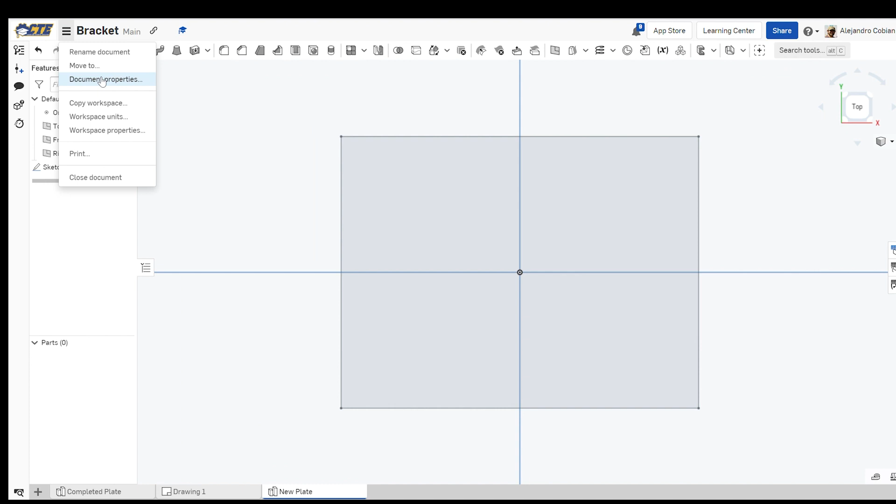Alright, so let's go to our top view. Let's create a sketch on our top plane. Let's go ahead and create a center point rectangle. This is centered right at the origin. Let's go out like this, and we accept. Keep in mind I am in inches, so make sure you use inches.

As I said earlier, right now we do not care about dimensions. Let's just go ahead and draw out whatever is going to be on our top plate. So we have a circle here, and another circle here. This circle is not centered at this horizontal line. I'm going to add an ellipse that is vertical to the 2 circles. We'll just place it here, and we'll make it like that.

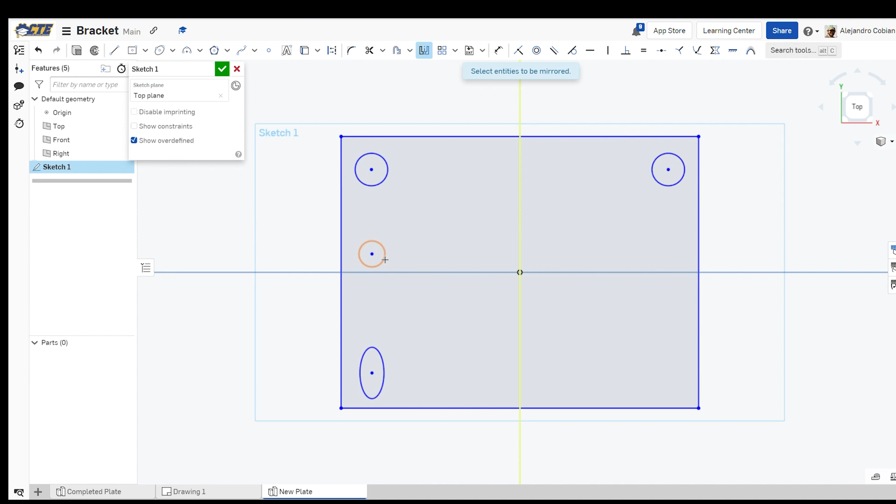So now we're going to use a mirror tool. Let's mirror our 2 circles and our ellipse about this vertical line. Let's accept that. Let's make sure that these 2 are equal to each other, making these equal as well. And now we accept, so now we're going to zoom out.

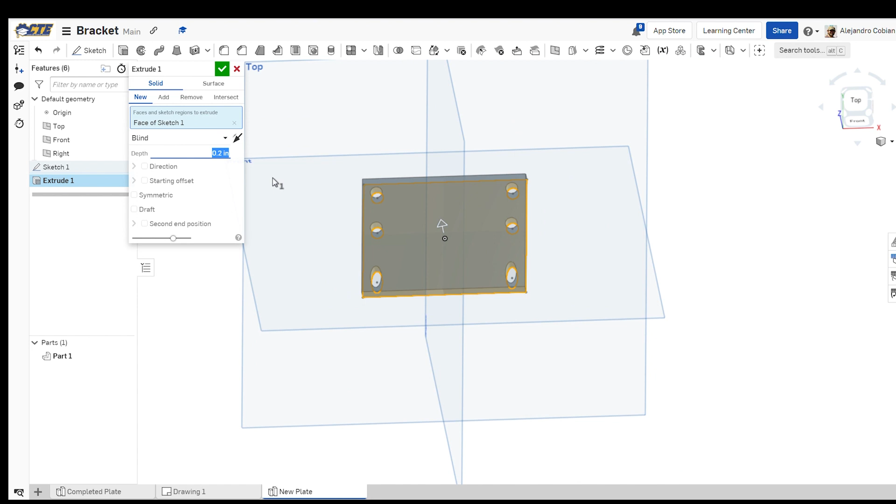And what we're going to do now is do our first extrusion. So we're selecting this plate, and let's just make this at 0.2 inches. And accept. Now I'm going to create another sketch on top of this plane right here.

This will help us to create this vertical piece. So once again, I'm on sketch 2 and I'm on this plate right here, on the face of extrude 1. Let's go ahead and use corner rectangle. Let's view our top view.

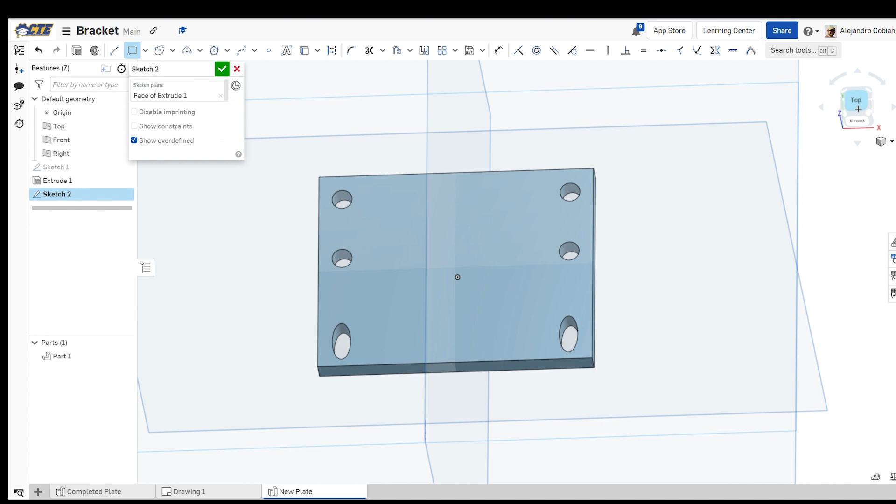Select this point and select this. Alright, and we accept. Now we're going to extrude again, extruding this rectangle that we just created. As far as the dimensions go, 1 inch is fine. Go ahead and accept this.

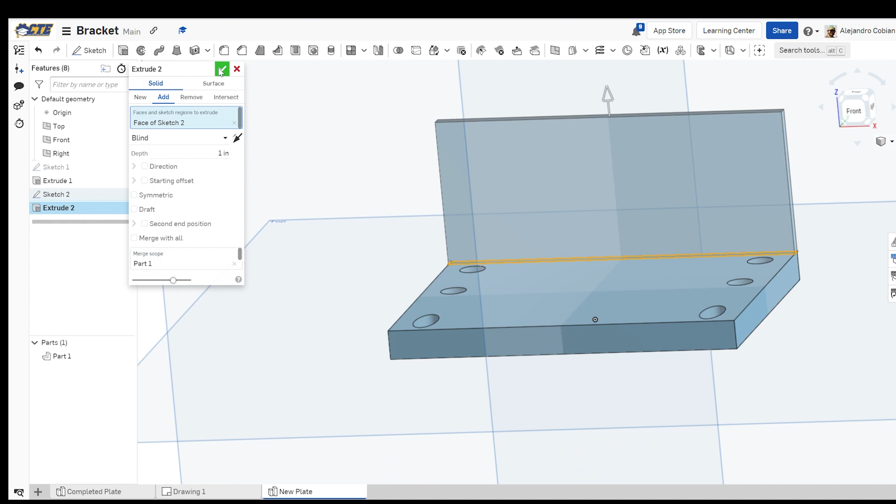So now we're going to go ahead and create these 3 circles that we see here. Let's go ahead and view our front view. Let's create another sketch right on this face here.

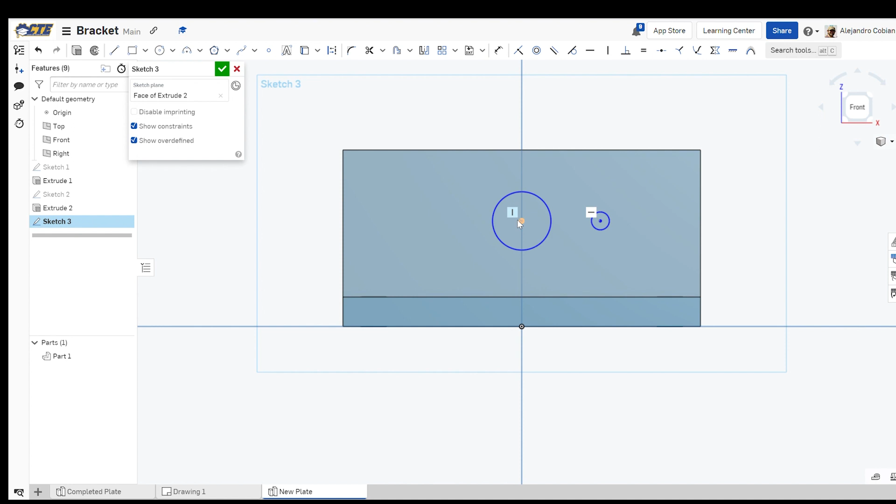Let's select center point circle. Let's place it right here, vertical to the origin. And then we have 2 other circles that are smaller, which are horizontal to this point here. Notice this point is horizontal to this center. And now I'm placing another circle, which is horizontal to our larger circle. Then these 2 are equal to each other, and they're also symmetric. Notice they're symmetrical about this vertical line.

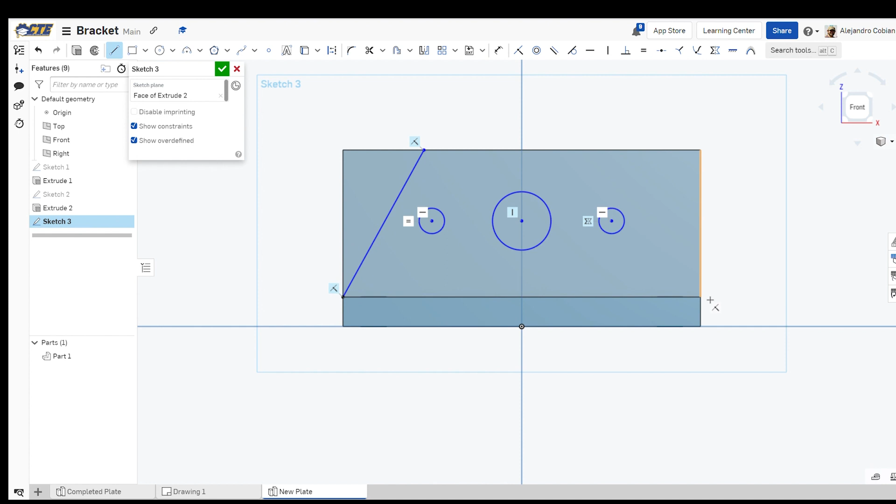Alright, and lastly, let's go ahead and select our line tool. Let's place a line from this corner up here, and we can adjust these later. And then another one here. These 2 lines will be symmetric as well, so go ahead and select them, click the symmetric tool, and select this vertical line. And go ahead and accept.

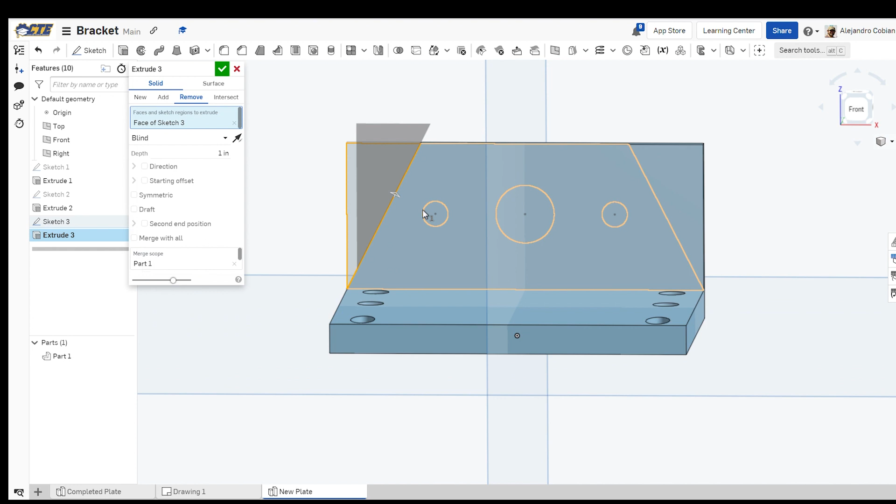Now we're going to perform another extrusion. So go ahead and select extrude, remove, and we're selecting this face, circle, this, and this. Notice we're going through all. So once again, select blind, click through all, and accept.

So at this point, we've created the bracket, but the dimensions are completely off. So now we're going to clean this up slightly just by adding a few fillets, using a fillet tool.

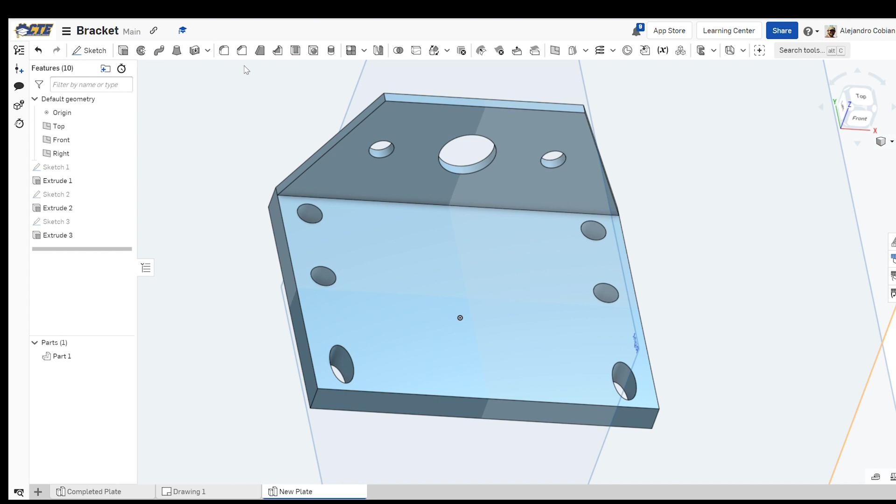So let's go ahead and select this edge, this other edge here, and then these circles here. And that pretty much sums up our drawing. Oh, let's also select this area here and then this one here. And we're pretty much good to go. So go ahead and accept this.

In this section, we're going to take some time and actually add the dimensions that we see listed on our top view, our right side view, and our front view. Let's start by creating the square for our bottom plate. So let's go to sketch 1, reorient for the top view, and zoom in.

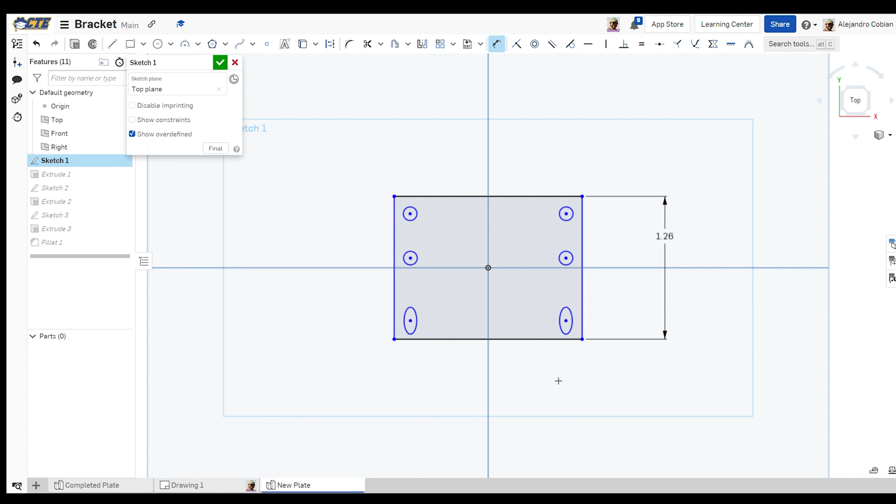The max width will be 1.26. Then the max length down here will have a value of 1.415. Let's zoom in. Recall that if these are in blue, we can just manually move them around. So I'm moving these. Before we continue, let's add a vertical constraint from this center point to this center point. If I move this, everything moves now. Let's zoom in this view.

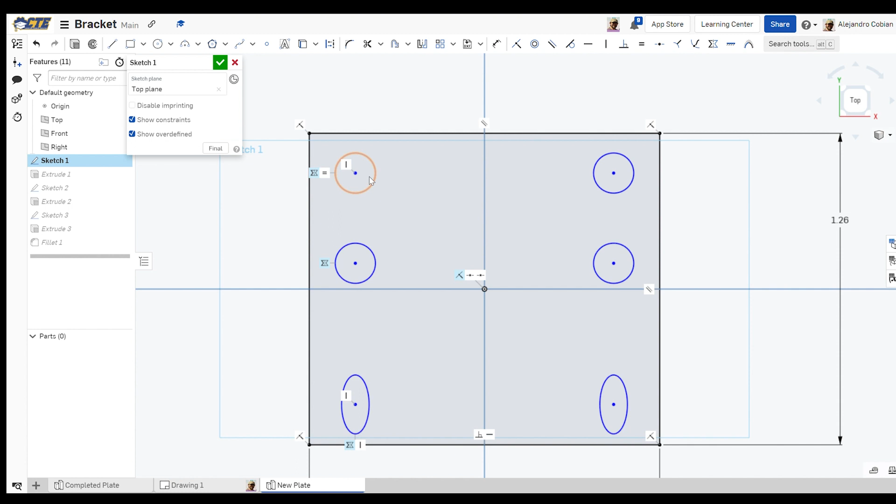I'm going to add a dimension for the diameter of the circle. One circle will have a value of 0.12. The width of this ellipse will have a value of 0.12 as well, and the height of the ellipse will be 0.36. I'm going to move it up a little bit so it doesn't look too awkward.

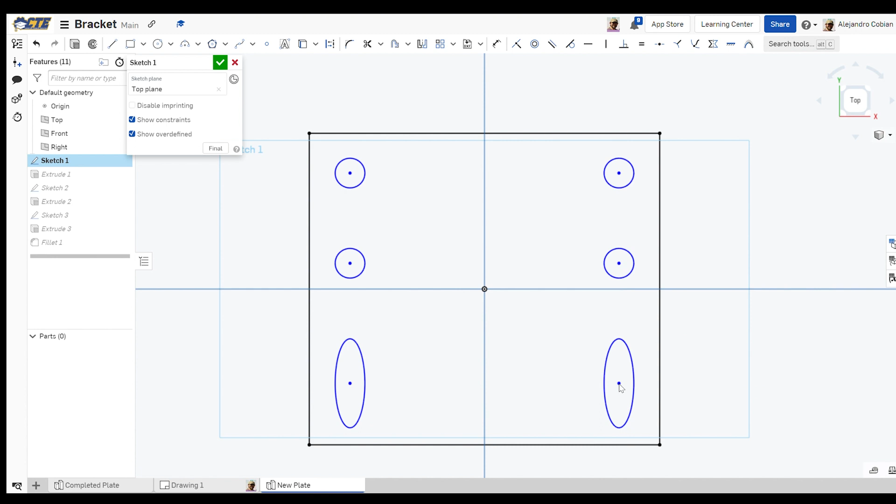Let's select the center of the circle, the edge of this wall. We're going to add a value of 0.135, and notice everything moves accordingly. The distance from the center of the ellipse to our bottom wall will be 0.194.

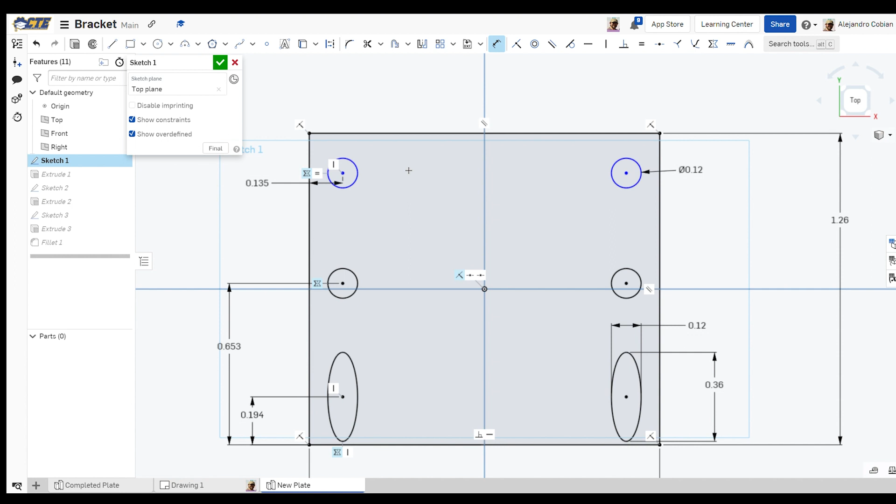0.194. Then the distance from this circle right here to the bottom will be a value of 0.653. And then the distance from the center of this circle to the bottom face will be 1.021. Notice everything is blacked out. We are good to go.

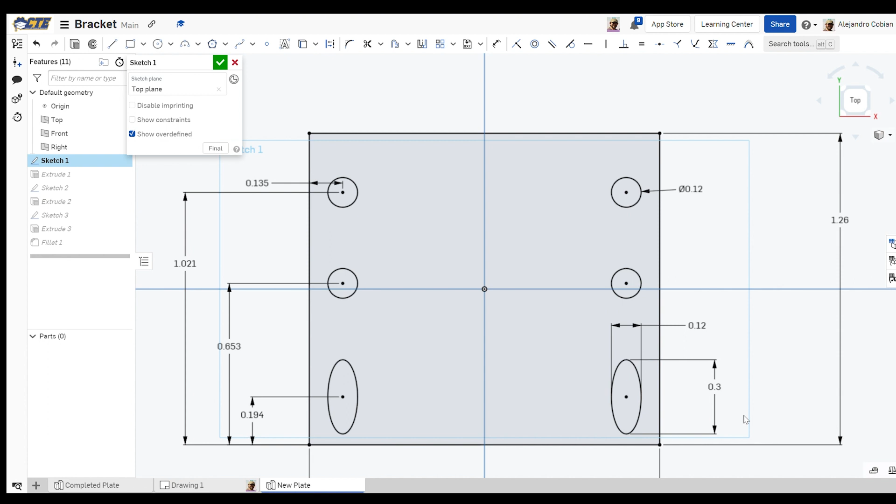So let's accept this, and let's actually make our ellipse a little smaller. It looks kind of awkward right there, so let's make it a value of 0.3. It's too close to the edge of the wall. All right, we're good to go.

Now we're going to adjust our extrude. This is the thickness of the plate. Notice the height of this plate from a right side view is 0.04. So let's go ahead and put that value for the depth, so it's 0.04.

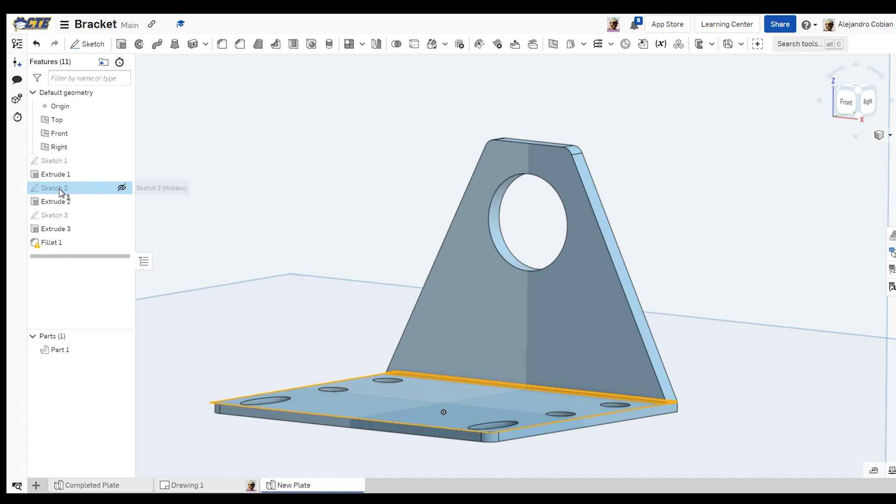And accept. We'll go to sketch 2, and that is the width of this right here, this rectangle. So we're going to add a distance between this line and this top line, and that'll be a value of 0.04. And we accept.

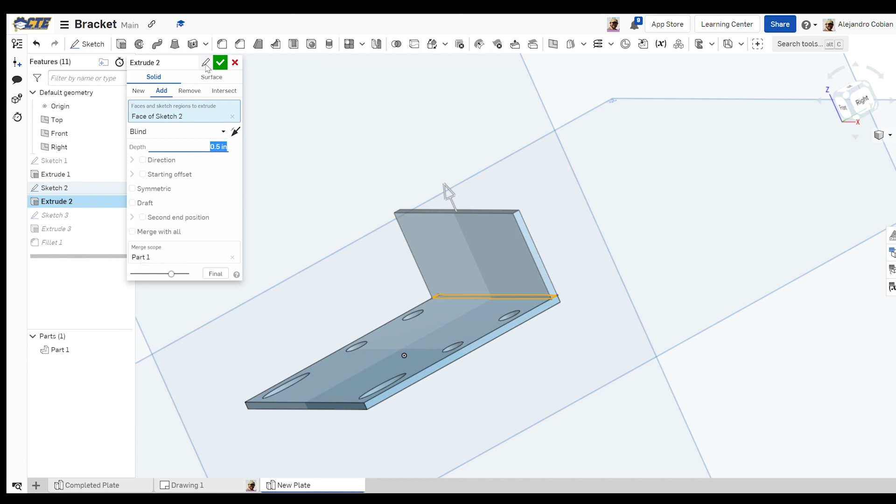Let's go to extrude number 2, and we'll add a value of 0.5. We accept. Let's go to sketch number 3. At this point, let's drag everything down and move it a little closer.

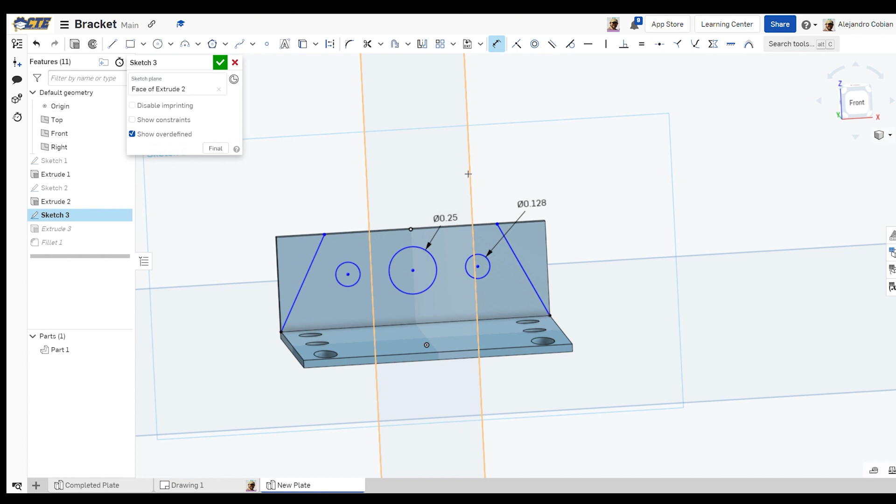The diameter for the center circle will be a value of 0.25. Then the diameter for these small circles will be a value of 0.128. The distance from this point to this point will be a value of 0.79. The center of this circle and the center of this larger circle will be a value of 0.323. So let's go ahead and add that here, 0.323.

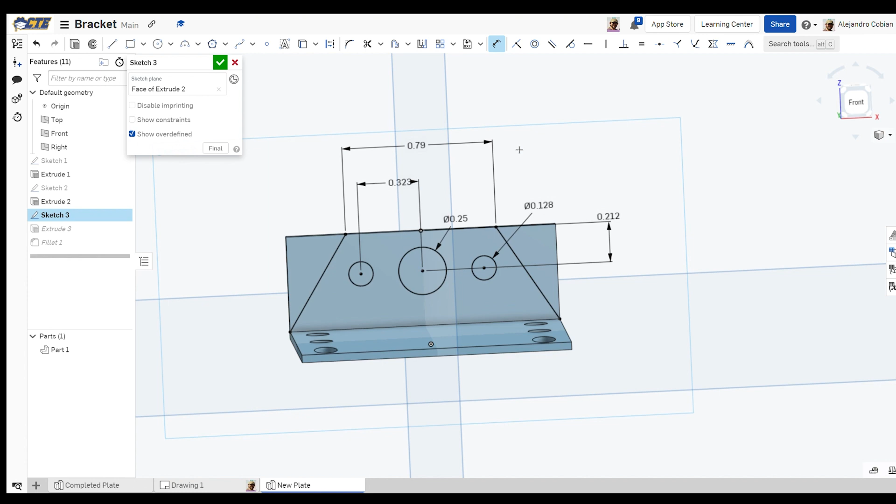Let's add a distance between the center circle and this line up here, and it's 0.212, hit enter. And we're good. Notice that our fillet's all automatically adjusted. Everything's rounded off, and that is pretty much it.